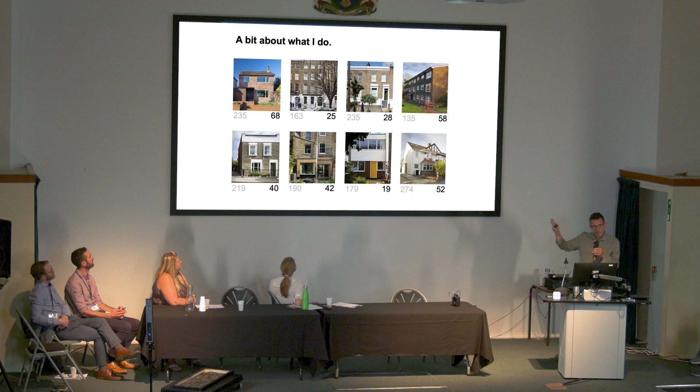Part of what I do, as somebody interested in retrofit, is to try and enhance buildings, often as part of architectural projects, and enhance their energy efficiency. So these numbers, this metric of space heat demand, show where the buildings started off when we found them, or this is our best assessment. And the numbers on the right in darker colour are where we think we've left the buildings.

Some of those have been studied, and post-occupancy evaluation can back that up. The general point I'm trying to make is that the grey numbers are generally quite big, however well you sail those ships, and the black numbers are much, much smaller. Actually, some of the oldest buildings end up doing the best, because their form factor is quite good, while some of the more modern buildings you might expect to be more retrofittable remain quite hard because of their shape, form, and other constraints.

So for me, I'm a pragmatist, and I seek to do as much as I can. I don't seek perfection in any of the elements I'm following, but I'm trying to seek balance. Hopefully, that's my aim.

On the energy front, I'm relatively ambitious, I suppose, because I think we have to be. A quick whiz back to comfort - this isn't a perfect expression of it, and there's a whole lecture about comfort, Robin took us through quite a lot of really important points this morning.

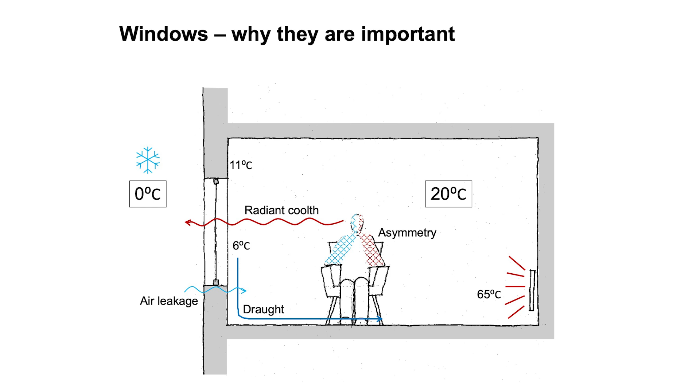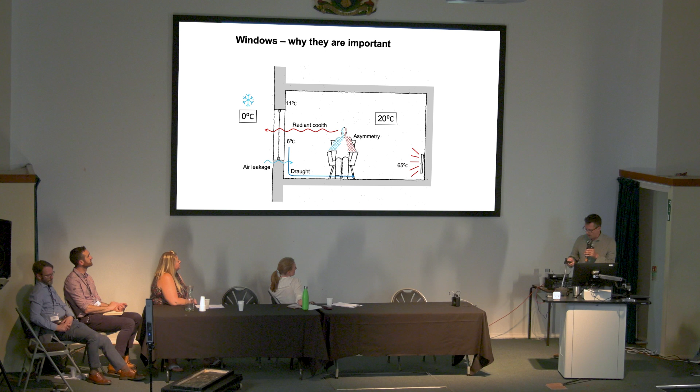So it's perhaps a bit more long-winded than I'd planned, but for me, understanding comfort and how we achieve that with energy efficiency - how those two things can go hand in hand - is really important.

This is another imperfect representation of how uncomfortable a particular space is and how hard it is to manage. This is an internal temperature plot of the space I work in, which is a small floor plate in a listed building with windows that have been rather unloved for many decades. We suffer with the draft, we suffer with the coolth, because it's a small room and we sit quite close to the windows.

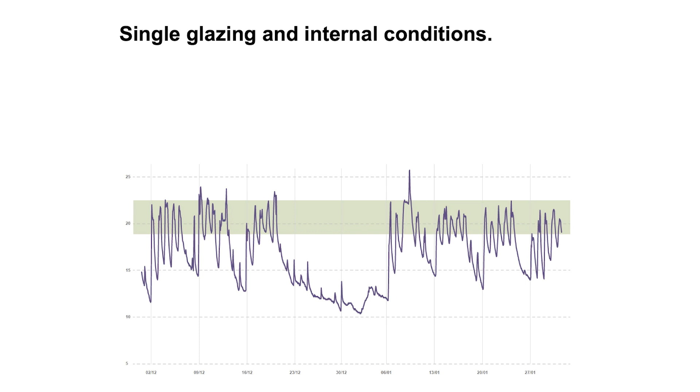We use radiators to try and offset the very strong discomfort when we come in on a Monday morning by raising air temperature. But you can see, whatever we do, the temperature's moving around quite a lot, which doesn't help, and it rarely sits anywhere close to where me or my team would say it's particularly great. My whole team comes to the office because they want to do something about buildings and our environments, and they sit there all winter in duffel coats and scarves and fingerless gloves - so we're not wandering around in boxer shorts, but we really struggle.

And I'm delighted to say our local authority have given us permission to interfere with the windows in the listed building we work in.

U values have been discussed quite a lot - this is some of my take-homes. Most buildings, their elements - the roof, the floors, the walls - even before we do anything, the U values are sort of small whole numbers, less than 2 normally. Usually the loft has got a bit of insulation in, so that's probably below 1. Whereas the windows, if they're single glazed, as you've heard, you very well know, are up at sort of 5-ish, between 4 and 5.

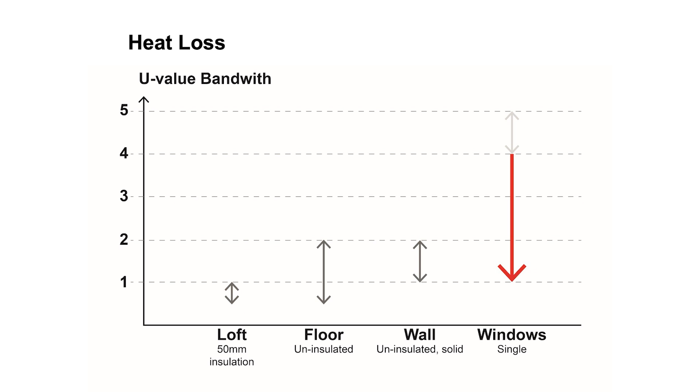So as a result, there is the potential to make big inroads to buildings with single glazing, especially if the glazing proportion's relatively high. Obviously if it's tiny windows in a cottage, that potential's reduced much, much more. So for me, windows are especially opportune as a means of reducing heat loss and improving comfort and avoiding condensation and so on.

Another bandwidth table on the U values - 2 or 3 people have shown similar slides, not sure any of them actually match each other completely. This is my experience, so it's not 100% scientific: single glazing is definitely up there in the 5s or 4s. Ordinary secondary glazing probably gets down into the 3s, into the 2s - some people have been as ambitious as suggesting below 2, I'm possibly a bit sceptical. But good double glazing, meaning fat double glazing, gets between 2.5, maybe into the low 1s.

But then what I'd call advanced secondary glazing, so this is secondary glazing with double glazing in it, or vacuum glass - you're starting to approach the 1s. Vacuum glazing in secondary towards the 1, with the latest generation of glass possibly below that. And then, passive house, probably quite chunky windows below 1.

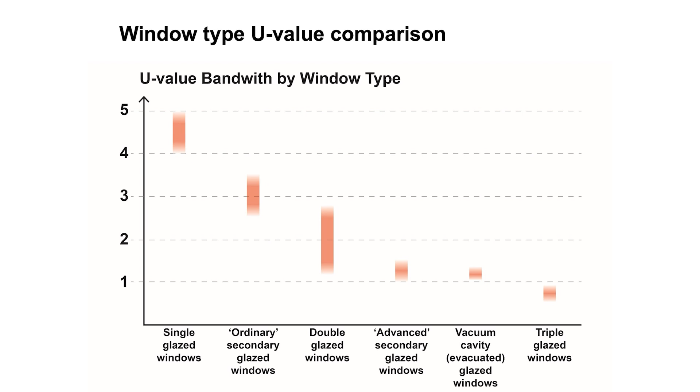So for me, the observation I take from this is that if we could do any of the last 3, in reference to the previous chart, you can make really big inroads into heat loss for buildings with largish windows, so most Victorian buildings, most Georgian buildings, which is mostly what I tend to work on because of their ubiquity and because of where I live.

I'm really keen not to sort of pick one horse. And I think there's a general drift I feel, especially in the listed building world, towards secondary glazing, because quite a lot of us can agree that it's a reasonable balance. But I'm not sure that's always the right path for listed buildings, personally.

This particular project, it's a conservation area project where the approach was based on sort of understanding the condition and the significance and a general understanding of the windows in this house.

So the top windows had already been replaced in the 80s, and those windows are rotting out. So we replaced them with modern, relatively economic, fat double glazed units, with a fatter mid-rail and some plant-on bars there. So not especially fine, but they're sort of quite high up. They're less important, I think, than the other windows. And certainly what we found before them was not so amazing.

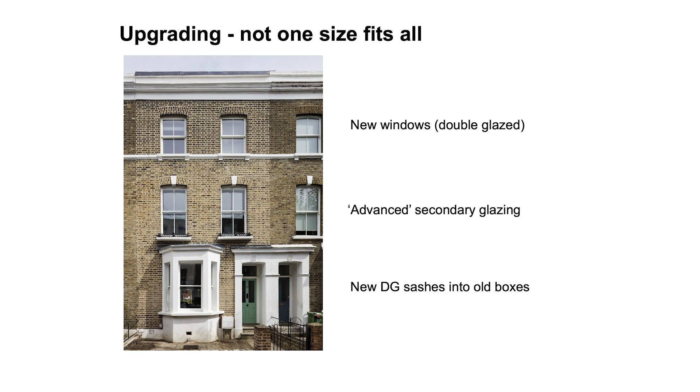So, in the Edwardian period, probably like its neighbour, somebody thought it'd be a really clever idea to take the shutters out because they were sort of old and fusty, win back a bit of space by removing the false wall which hid those, and put in modern glazing with big panes of glass.

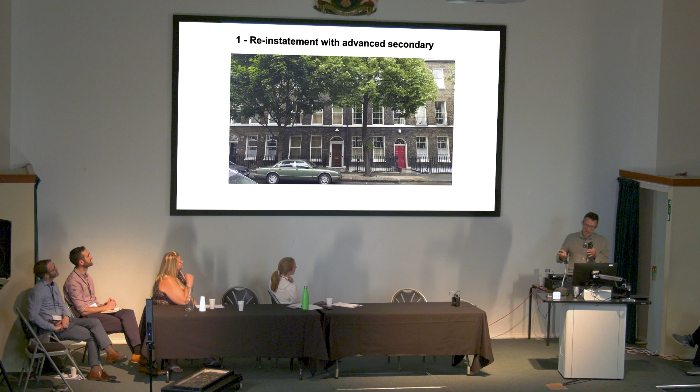And there's a whole argument which the neighbour ran into 6 months after us about - is that a really important part of the story of this building? I'm not going to go into that one today. But our client, at least, was really keen to return this building to its former glory, shall I say? And we felt that was a potentially reasonable thing to do, if we felt we could work other things into it.

So this is an example of one of those windows. Probably one of the worst or the most damaged floor, actually. So quite a lot of fabric had been lost. The boxes were Edwardian, and the sashes were in quite poor condition.

And you'll see in a moment, if I skip to the next, that's what it looked like sort of over 100 years ago. There was a whole set of shutters there and a false wall which had been taken out. And interestingly, they'd extended the skirting 20 centimetres and moved the cornice to sort of hide all of that. That's sort of where the story might have been lost a bit in what we did.

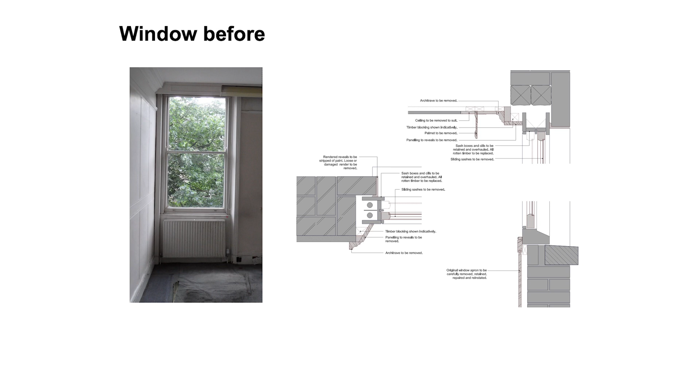In any case, we've reversed it. This is a restoration, rather than a conservation project, perhaps. But in the process of reinstating the shutters, we included secondary glazing, which you can see in the image there, because we've pushed up the lower sash.

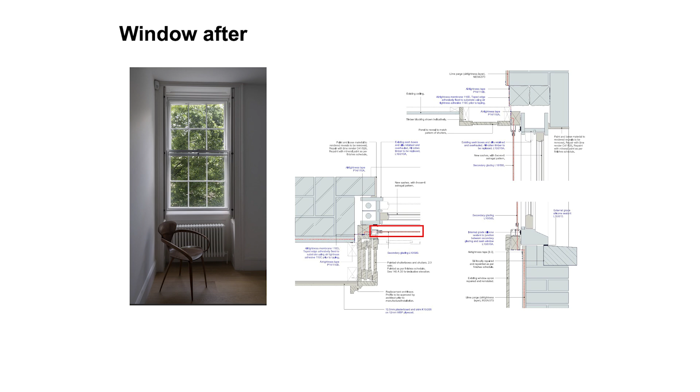So most of the meat of the secondary glazing is hidden by the reinstated shutters. This felt at the time like a reasonable trade-off in terms of transforming the energy efficiency of the house and meeting our clients' desires. It was also an interesting exercise in understanding what had gone on and how we might borrow details from the Dickens Museum down the road and bring it back up the street.

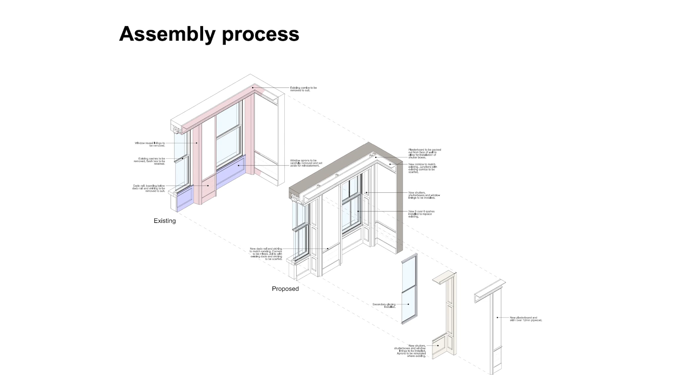This is the assembly process that we planned. The pink and purple stuff is things which we adjusted or took out and repaired. Then you can see the secondary glazing going in and the shutter boxes being planted over the top, and then the false wall going in over the top of those and a cornice being reinstated. So that's one example based on quite a specific starting point.

The secondary glazing here was double glazed, so it's pretty high performance. The overall window is about 1.2, 1.4, perhaps a bit better than that - I think I'm being fairly conservative. We've checked the build data after the project, and the client didn't invest in many other fabric measures apart from roof insulation, but the windows alone were making about a 30 to 40% difference on the heating demand.

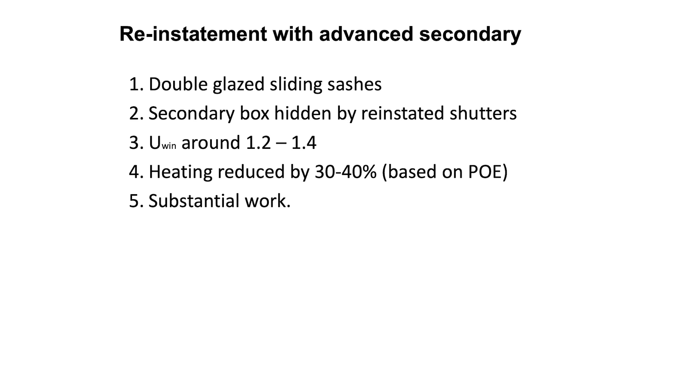The client's very pleased with the level of comfort they got and the stability within that house. It was quite a substantial bit of work to make the shutter boxes and so on, and I might return to that later on. So that's the first one.

I've probably got about five or so minutes left. I think I started a bit late.

So the second one, it's quite a similar result, but slightly different starting conditions. A house further down the road, actually a slightly finer house, with more original details, some original windows, some Victorian windows. Most of the glass had gone due to World War II.

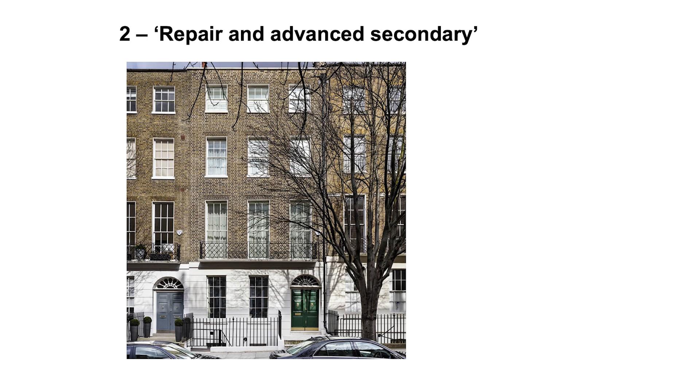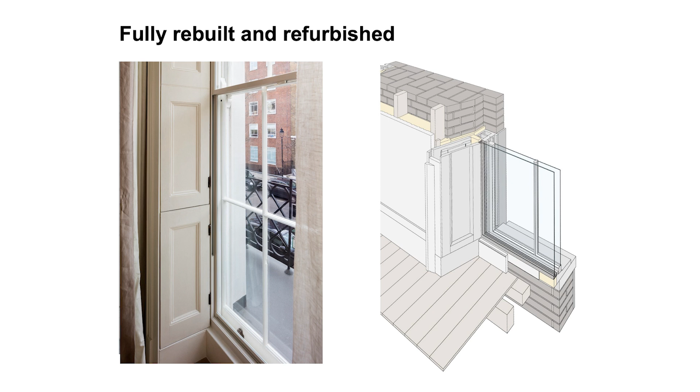In this one, there were shutters in situ, albeit painted shut and quite damaged. There were bits of rot, quite a lot of rot in the windows. The solution was to take all of that apart, rebuild the shutters and rebuild the windows, and insert this secondary glazing between those two elements. So we've interfered with a bit of original fabric, but we felt we were justified because we felt those jobs needed doing anyway, and it opened up the opportunity of including this glazing, which again transforms the house.

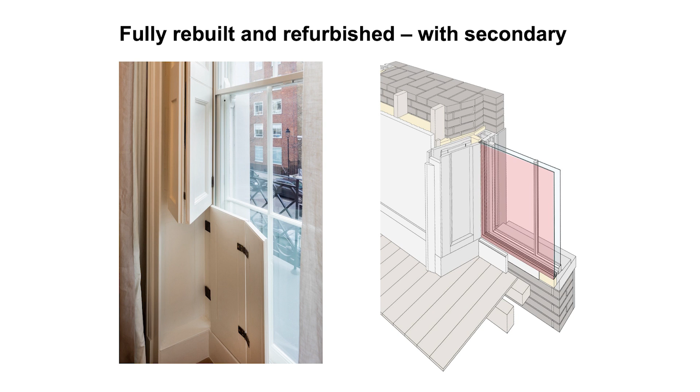We also insulated behind the shutter boxes and within the false wall. Quite a complicated process, even on the drawing, but on site, quite a lot of fine carpentry going on.

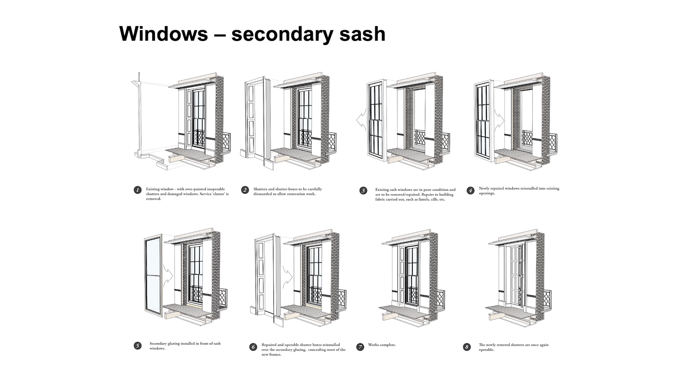On the ground floor, we ended up doing something slightly different. We had quite a fat staff bead, and we managed to fit in a very skinny secondary casement with evacuated glass again. There it is there.

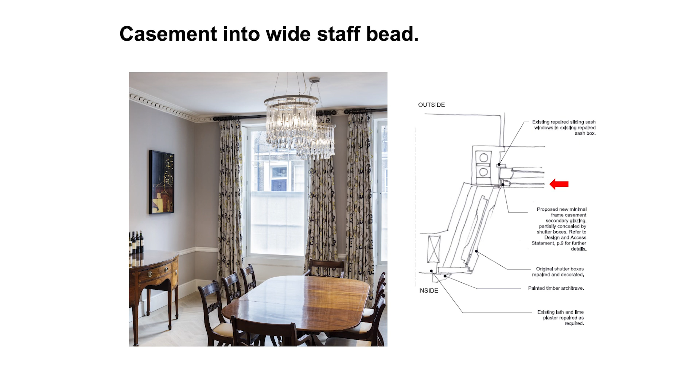I think for us, it took a lot of convincing the conservation team that the impact of this was minimal, but it's there, and certainly anybody who looks at it in detail finds it.

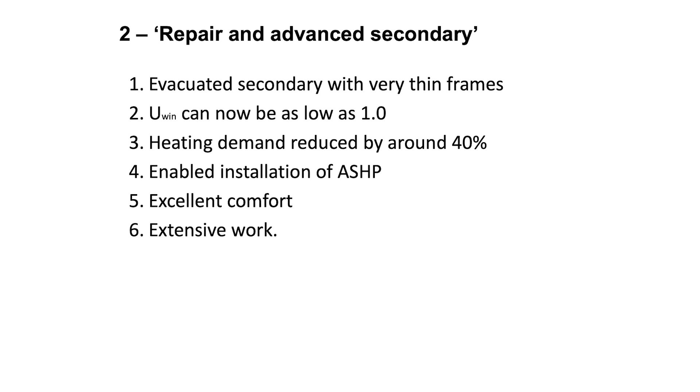With this one, probably your U-value down perhaps as low as 1 because the glass was slightly better. Again, heating demand reduced by about 40% just through windows alone because of the large glazing area. This enabled the installation of an air source heat pump, which further decarbonises that house. Especially good comfort because it's done in conjunction with insulation, but yeah, very extensive work.

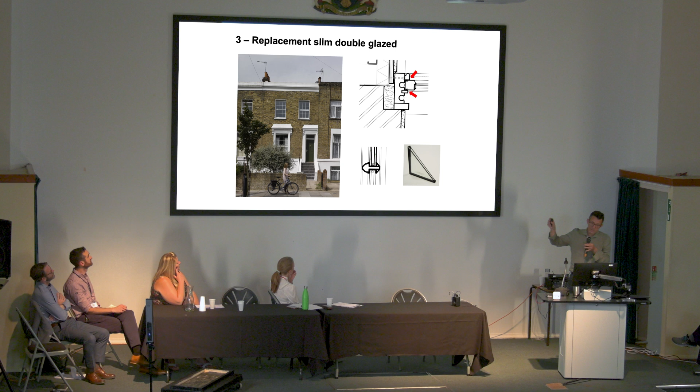So the third one is a replacement of a replacement, a bit like the first windows in the earlier slide. So 1980s sashes replaced with higher quality ones, in this case using slim double glazing. This was back in 2010 before evacuated glass had really made it to the marketplace.

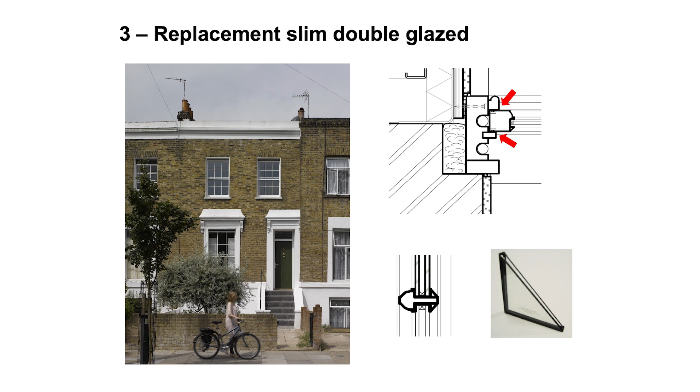Big upgrades in terms of air tightness because of the way the window's made. It's quadruple stripped and there's a fairly big difference on the U value, but sort of mid U values and declining as the gas escapes, though it actually seems okay so far. Lots of edge seal, so more concern because each pane is individual, so you've got many linear meters of edge seal per window, and you've got the argon and krypton with their high embodied carbon, which other people have spoken about. So I think at the time, this felt like a good solution.

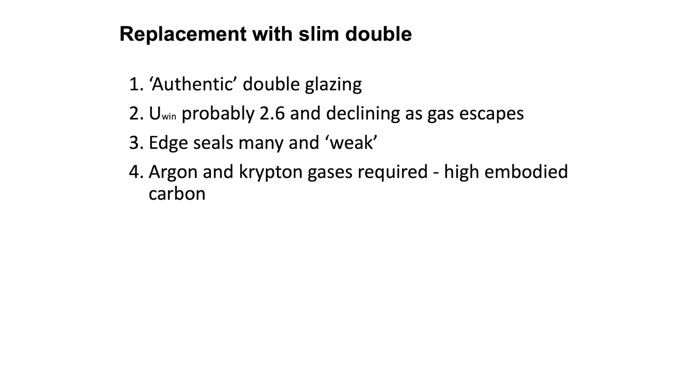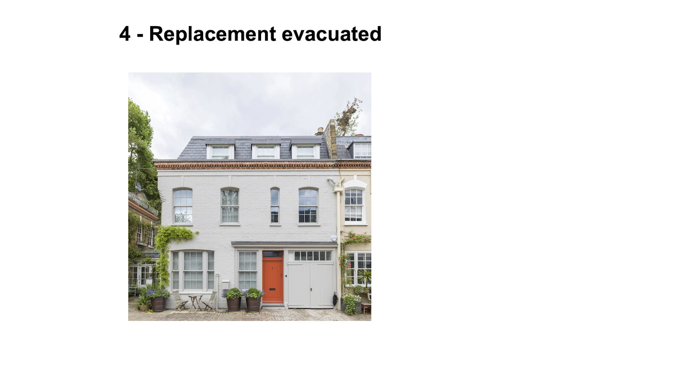It feels, for me, less so now, which takes me on to number 4. Again, this is a replacement window of a replacement window in a conservation area. So we were able to do this without too much justification. So there's the window.

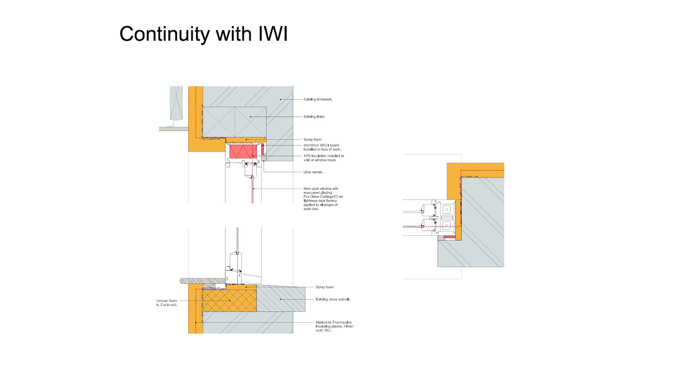Aligned with internal wall insulation, that's it looking from the inside. I'm deliberately using the word authentic here because it's a much contested word.

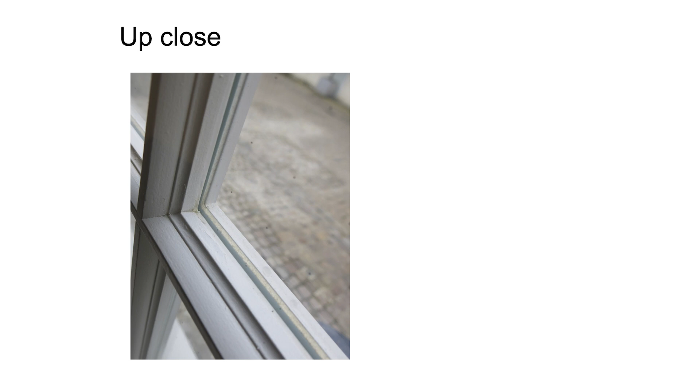And for me, in houses like this, I think the appearance in terms of the general streetscape is probably the most important thing. And what this gives you, even close up when people visit - certainly people not from this audience, more sort of lay people - they're not aware that this is high performance glass. They think it's a single glazed building, so there's this sort of appearance of single glazing. The panes are 1 per sash unit with plant-on bars, but you're not really aware of that.

The edge seals are much fewer, therefore, so there's much less thermal bridging, there's much less chance for degradation. U value is down to sort of 1, so very good. The noble gas is not there. And this is relatively straightforward to do.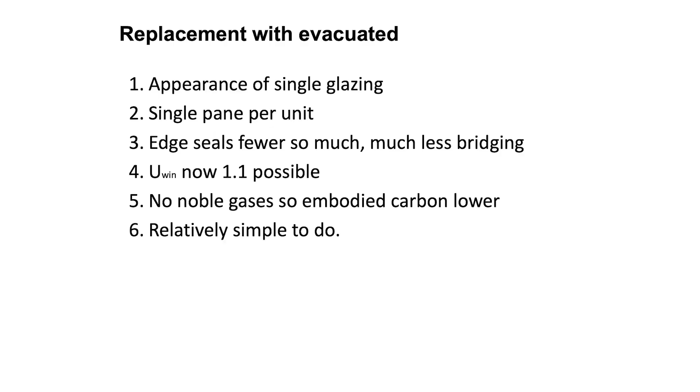So returning to case study 1, that listed building, where the windows had already been replaced and much change had already taken place, I wonder if this sort of solution might have been appropriate there. I mean, I sort of believe it would be, but how I might get that past the conservation team in that borough would be the question.

So a few concluding thoughts on my journey through windows in the last 10 or so years. Window upgrades are enormous chances to transform heat demand in buildings, and arguably to enhance character and significance if that's done quite thoughtfully. Both U-value and air tightness improvements need to be thought about at once.

One of the challenges with just upgrading glass is we're not necessarily improving the overall air tightness of windows, which Georgian sash windows weren't fitted with air tightness in mind. I'm not sure they were fitted with draftiness in mind either - it was just the way they were built.

Window upgrades can be discrete, in terms of there's only one thing going on and you can contain disruption. It can be done relatively quickly. High performance, I would argue, can be achieved with little harm.

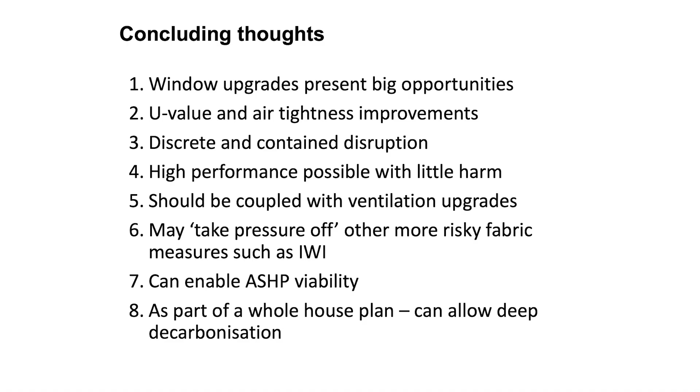enable air source heat pump viability, which - the two together - the effect is massively decarbonising. But the one without the other, certainly the air source heat pump alone, is probably quite a difficult thing to do. It probably means very big radiators, quite a big bit of kit, probably quite difficult to manage.

So as part of a whole house plan, that's something I've not spoken about today - I don't spend most of my life speaking about it. Windows can really support and allow deep retrofit, deep decarbonisation.

Finally, a quick reminder - I always show this slide - overall in the UK, 62% of our energy use in dwellings is due to heating. That's just a reality. We really need to change that.

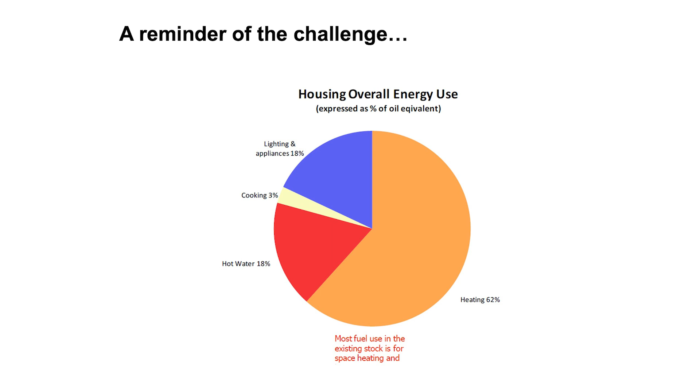And this is a plug for a different cause, but the one of rolling out decarbonised heat that needs to happen very, very, very quickly. And I see windows as an enabler towards that. Thank you very much.